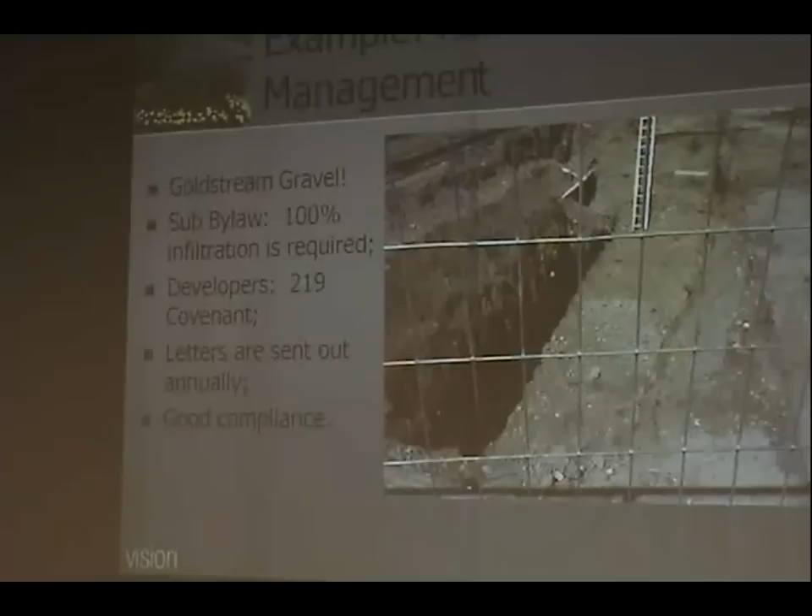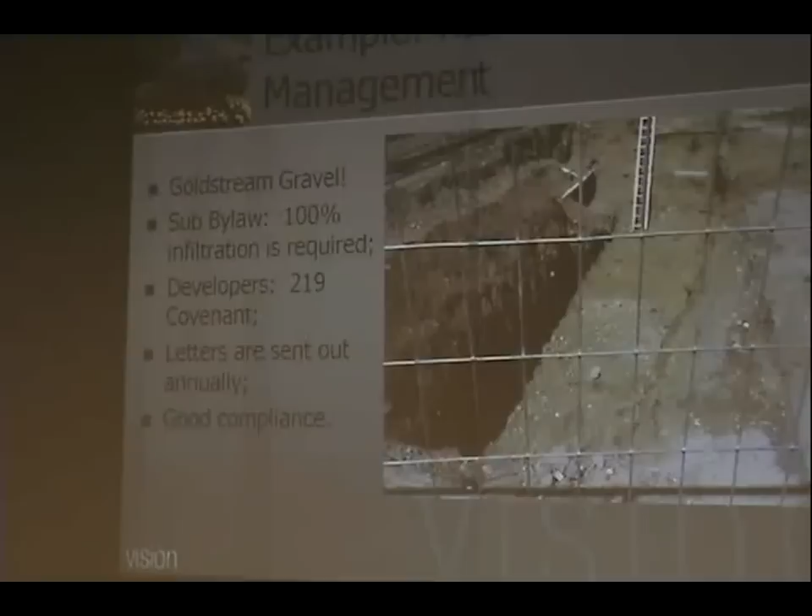Just an example of that creative approach. This started almost from the very beginning in the early 1990s when Langford was incorporated. Most of the downtown core, the area you're sitting on, is basically a big gravel pit, and there are a number of other gravel pits in this area. So we have a lot of very good permeable gravel in and around the area. It's provided gravel to the Victoria area for quite a number of years. In particular, Goldstream Avenue here is basically sitting on a gravel pit. Groundwater tables are very low in this particular location. As a result, under the Ministry of Transportation Highways, when they were the approving officer, we ended up with a lot of rock pits and on-site systems that were there.

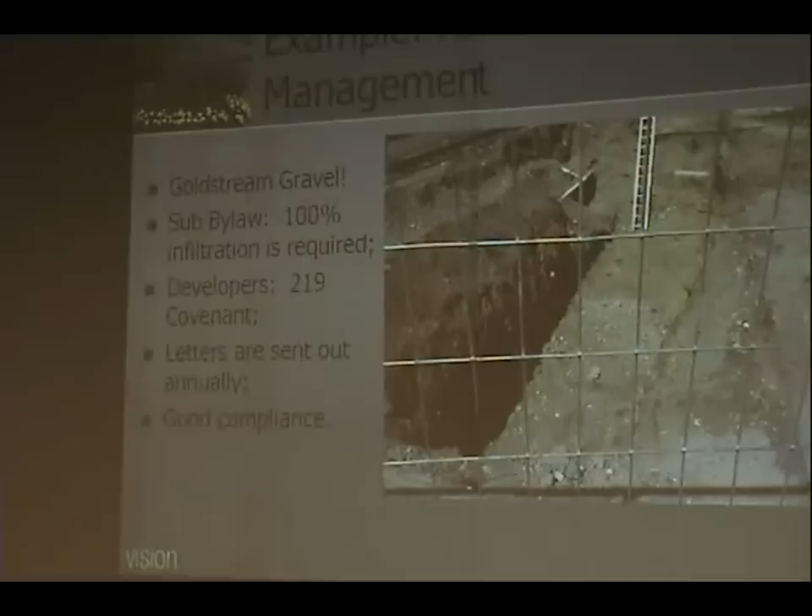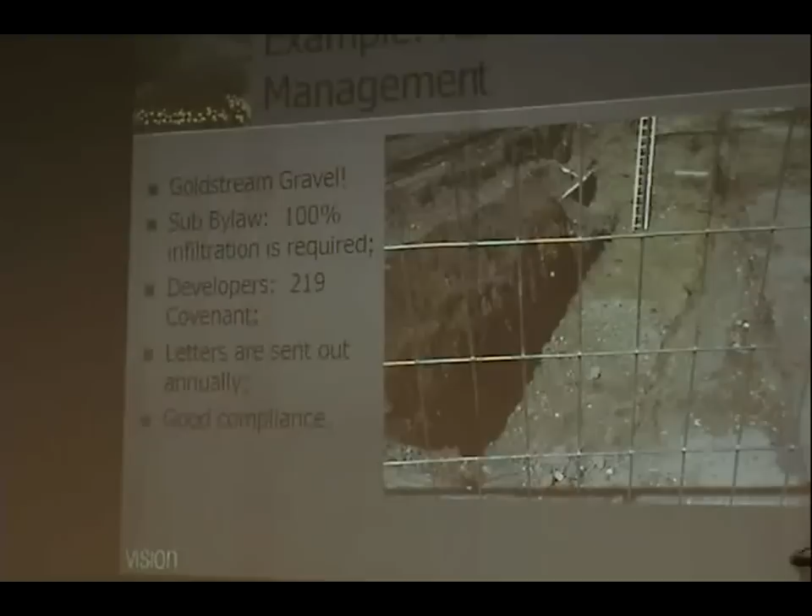At the same time, when Langford incorporated, of course, the buzzword was infiltration. So the engineering department of the day went 100% on it and said, okay, we're going to write in our subdivision bylaw, developers shall infiltrate 100% of their site. That was written in there in black and white, in the early 1990s. Most of the development was occurring in and around the downtown core, so they had quite a bit of success with it.

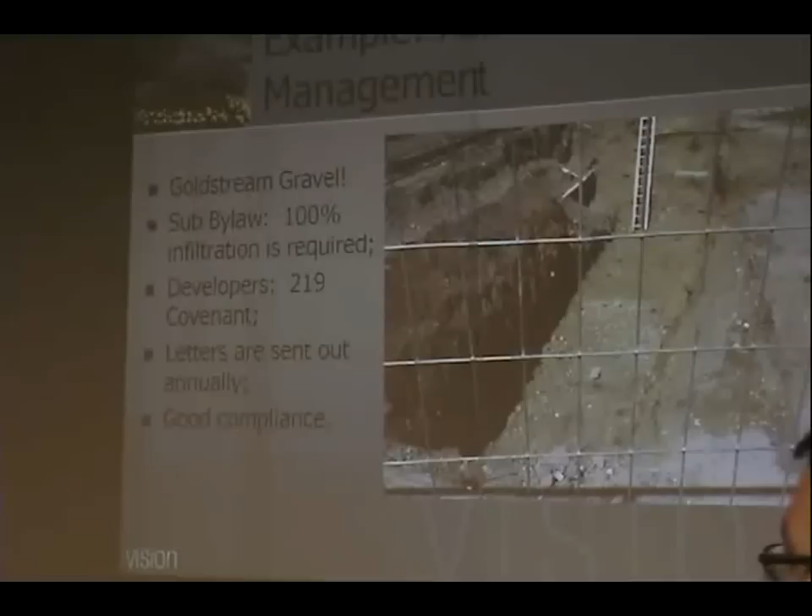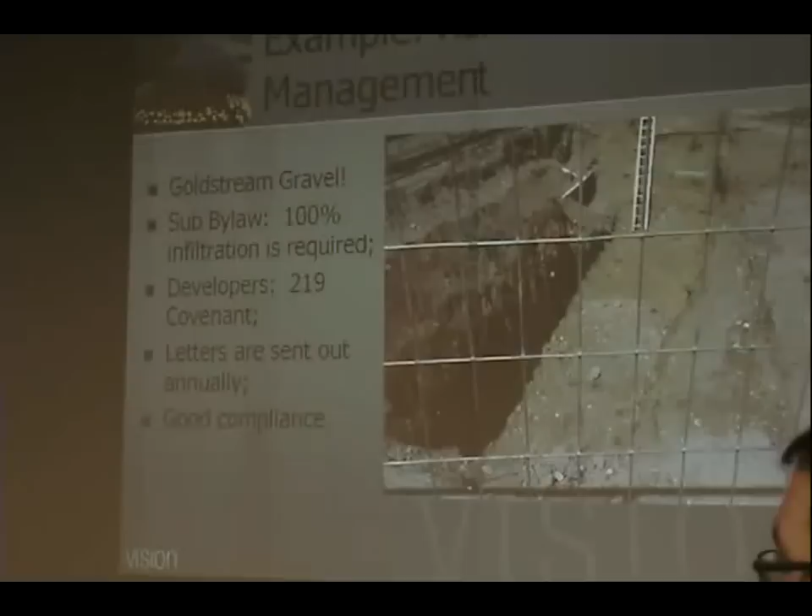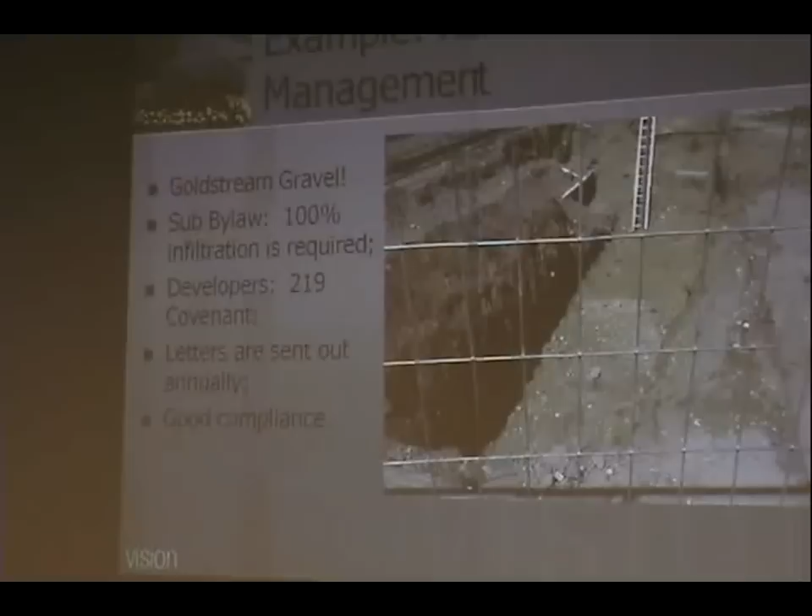One of the concerns, though, is that when you have a development site and you're asking them to basically deal with their own drainage, the first thing that happens is we don't get a storm drainage system in the street because there's nobody to build it. It's not a requirement, so the street ends up going complete infiltration as well as the developments. Of course, we're prepared to take that on the street side. We have a maintenance department. These things have to be maintained on an annual basis and replaced about every 15 years. So we have a program of replacing our infiltration systems. But the developers were a bit of an issue to deal with.

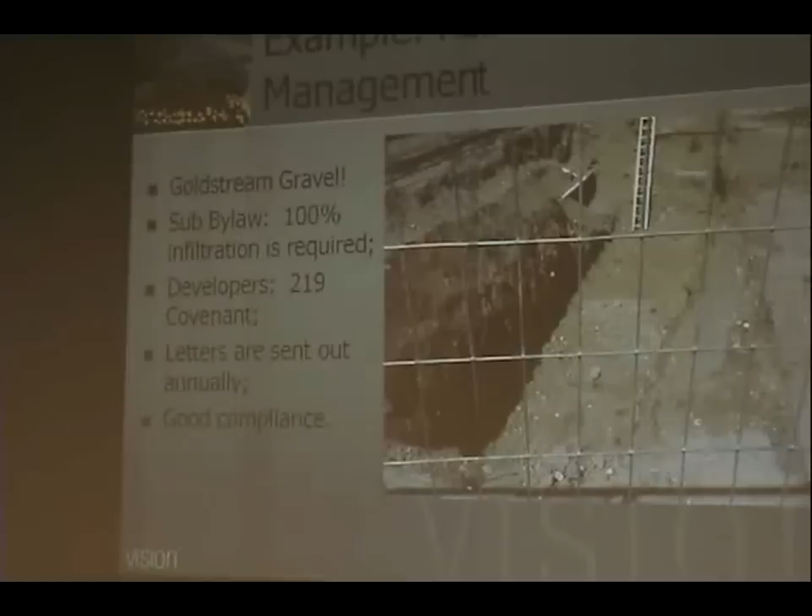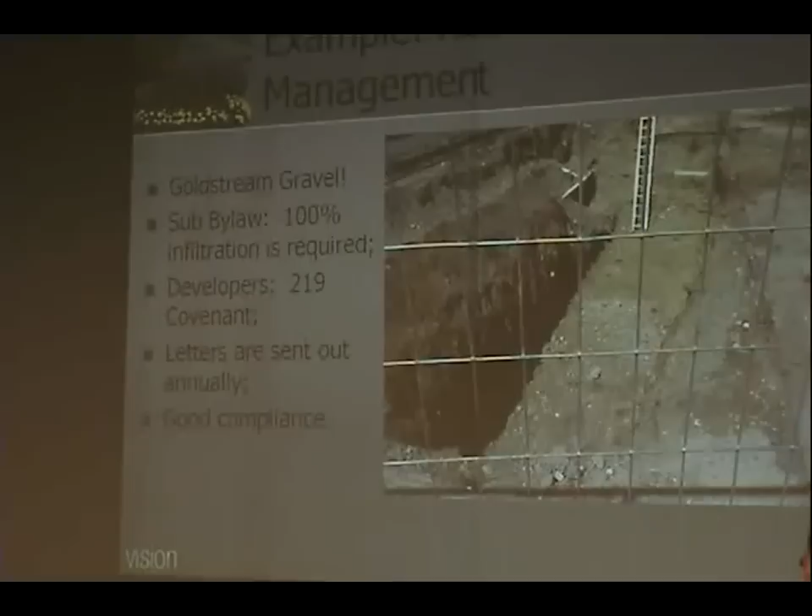So the policy that was created at that time was to ask developers to register a 219 covenant. These are mostly for stratas. The covenant says that the strata is responsible for maintaining the system on an annual basis. We send out letters - we have a listing of all those projects that are in that state, and we send out letters annually requesting them to provide us with copies of their maintenance record. It's worked fairly well. We've got a number of developers now - this has been in place for so long, a number are starting to say you don't really need the 219 covenants, people know. I think the concern was this is a different standard than what folks are used to - 'what do you mean I don't have a storm connection? What are you talking about?' So we wanted to make sure people were aware that this was somewhat a different situation. That was the purpose of these covenants.

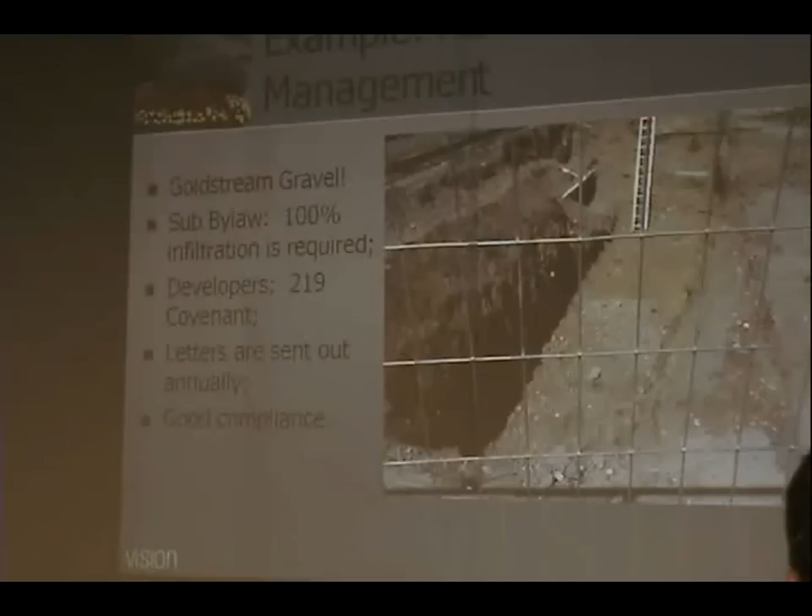So what's the infrastructure in the road that you have to replace every 15 years? Basically, there's vertical and horizontal infiltration systems. So it's a catch basin? Something like that, that's a vertical one. There's quite a few of them out now, they're very standard. This is, I think, one on the Peatt Road project - you may actually see it. This was taken yesterday, so you'll probably see one of these things as we do the loop down around Peatt Road. We're also putting in horizontal rock pits as well as the vertical ones.

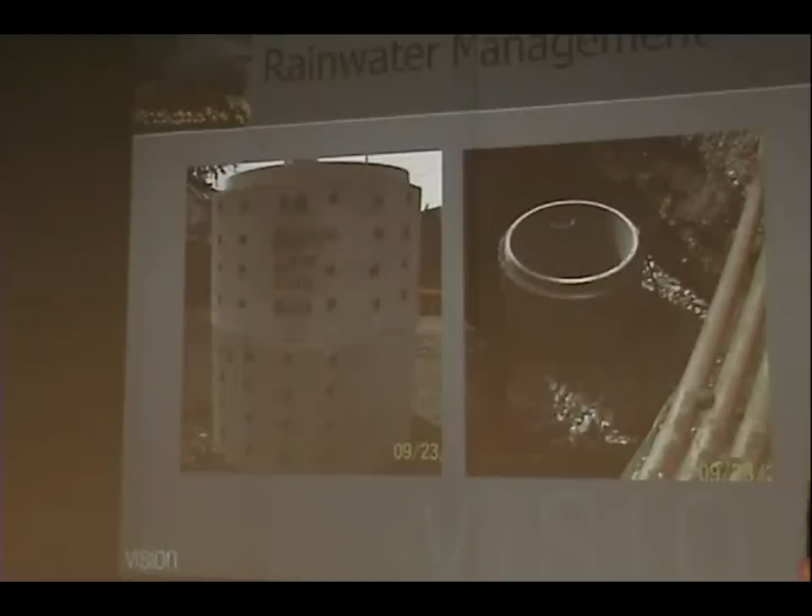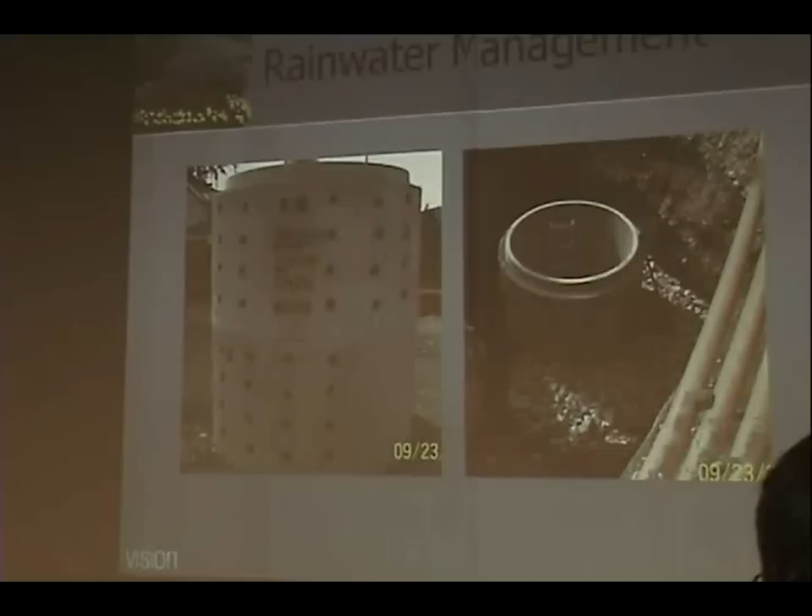So any issues about getting rid of the material that gets pulled out of those? In the non-residential developments, we ask for oil separators and some water quality boxes, so we're asking for them. After about 15 years - and it varies, we're just reaching the theoretical end of the lifetime on the first ones - the design has actually been modified over the years and improved. They have more capacity now than they did in the initial years. But we have replaced 3 or 4 of them. Basically, you have to go and dig that up because the gravels get clogged up.

Now, in between that - that's kind of at the very end of the lifetime, I'm forgetting to tell you all the stuff in between - you can go in there with a high-pressure washer and clean them out. So you do this annual maintenance, and it keeps cleaning it out. But eventually we know these systems, they don't last forever. Are you going to see these on our walk? You'll see one of them on Peatt Road, this one here - I think this one was taken a couple days ago. Have you ever had situations where the infiltration rate is inadequate for what's proposed? Good question.

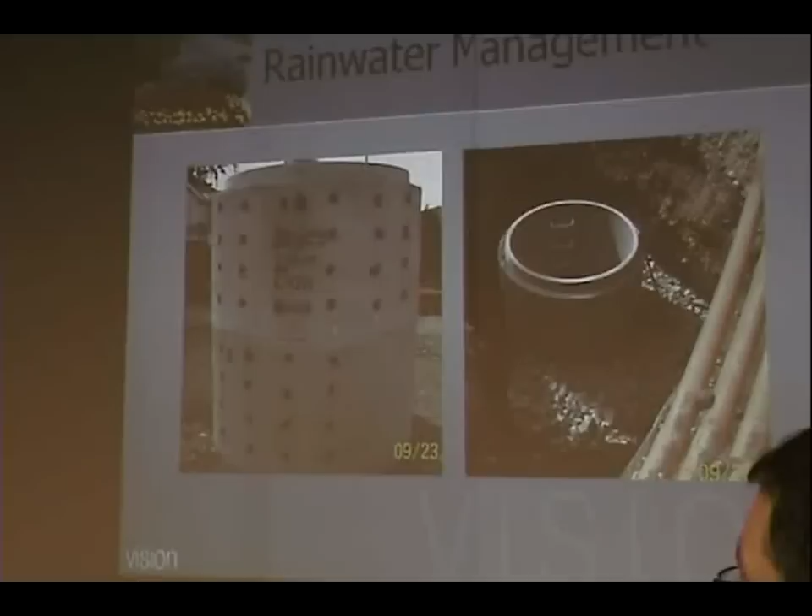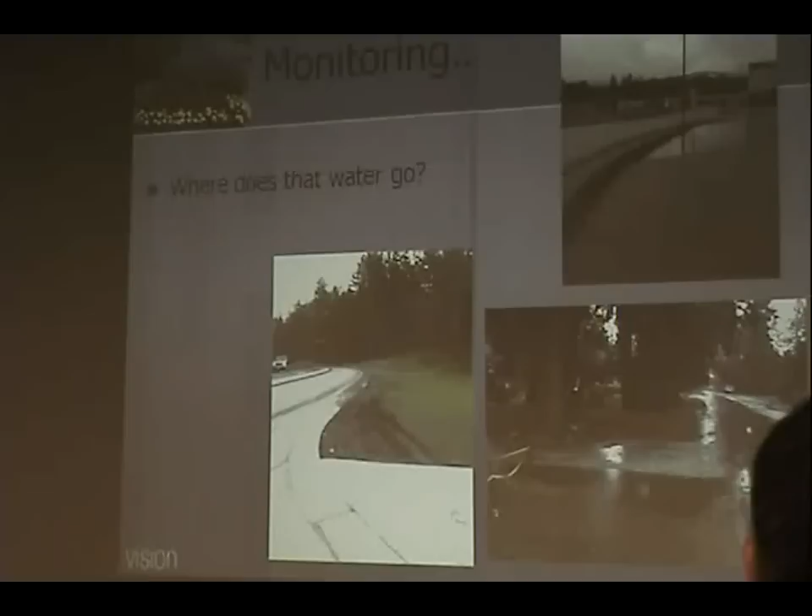The project here, right across the street if you open the window, has taken up virtually 100% of the property. So there's no room to put an infiltration system on the property, we think. It's three stories deep, there's underground parking, and there's a rock bed underneath that.

This is the problem we're having in the downtown core. As we densify at the lower densities where we had a bit of open space, it didn't work, and I didn't like the looks of this. So we asked them to put an overflow pipe that takes drainage out into the street. We have a horizontal infiltration system out in the street, and that horizontal pipe can function as a storm sewer if we have problems in the future, because the value of this building is too high to trust the rock business. Despite the fact they seem to have a pretty good track record, this is the point where the risk was a little too high for us.

So we're now actually, you'll see it on Peatt Road, our storm sewer being designed as an overflow pipe. We'll continue to use infiltration because it makes sense here and works reasonably well, and we'll continue to maintain them. But we're going to have a few overflow systems so that there's a storm sewer somewhere in the area if we have particular areas of concern.

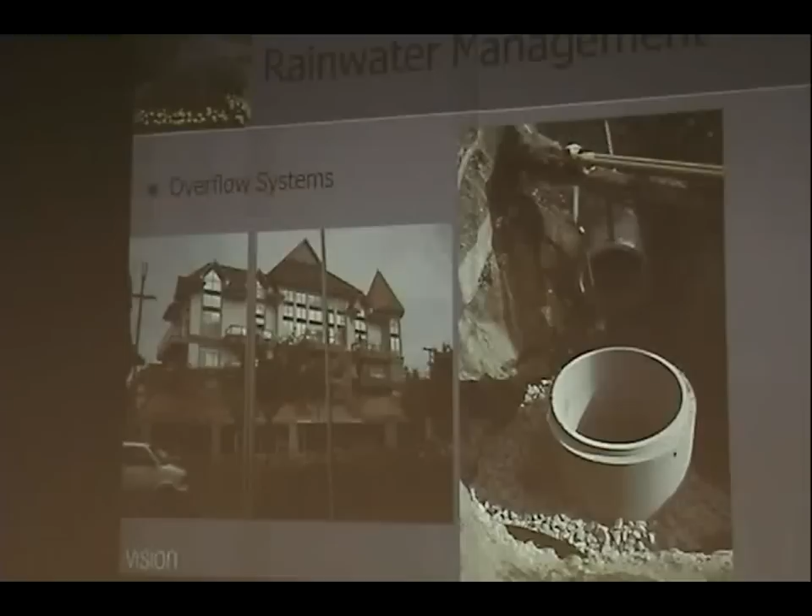The problem is if you get an area right in the middle of your downtown core that's not infiltrating, well, where's the storm sewer? It's five million dollars away, I think. So that's the other side of the infiltration pond—it already is detained, most of it goes in the ground. We don't actually expect the pipe to run, we're hoping it never does because it's all infiltration systems through there. But in the odd event, if one rock pit fails, it can get to the next one through the pipe system, so it provides an extra level of safety.

And if over time they all happen to clog up where you have a 200-year storm, we don't have to design these things to take a 200-year storm, so it makes them more economical. You can take that 1% or 2% of the water that comes through on a 200-year storm and get it down into a detention pond under the lake.

So, some of the challenges. The first question was from John, if infiltration isn't enough—yep, just one other question.

When you did your OCP, I'm assuming there's higher density going to be occurring in the downtown core. Was that taken into account with your infrastructure, and are all of these new higher density buildings, such as the one across the street, going to be draining into the street, and will that support long-term? We're evolving, and as the density goes up, we're going to be asking for these little pieces, basically asking to do horizontal infiltration. As that process proceeds, we'll be getting pieces that function as a storm sewer if need be. So we're asking for them to do that now in the downtown.

You're planning to? Yeah. So here's an area here in South Langford—core infiltration, same policy, but it didn't work so good. So this is an area where we're actually putting in some storm drainage and detention ponds and water quality, surface-type features that most municipalities are doing. We're doing that in South Langford.

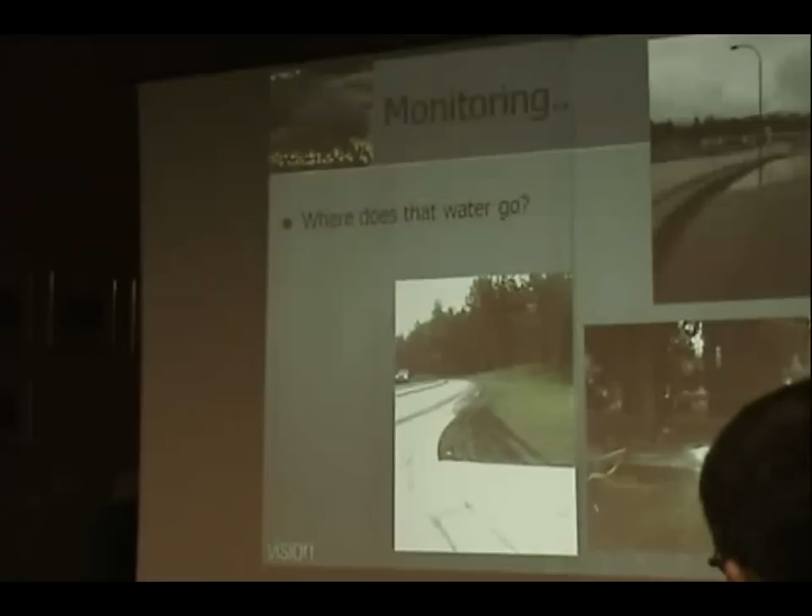Here's one here, you'll actually drive by it today. It's a dinky little site on Jacqueline. Every once in a while in the middle of winter, there's a retaining wall around the corner with a drain at the bottom. The water flows out the drain because it's coming from the street, but the water can't get down—there isn't a permeable layer low enough. It's been trapped in one of the service trenches and runs along the trench. So we have a business owner here with a nuisance flooding issue. It disappears a day later, but now we have to go in and make some changes because the water didn't quite go where we thought it was going to go.

This is up on Bear Mountain. This sort of started in the 1990s. We have basically a swale system on both sides of the road—if you've been up there, you've seen these flat curbs. The intention is to get the drainage to go into the swales and do the water quality work on them as they work down the swales.

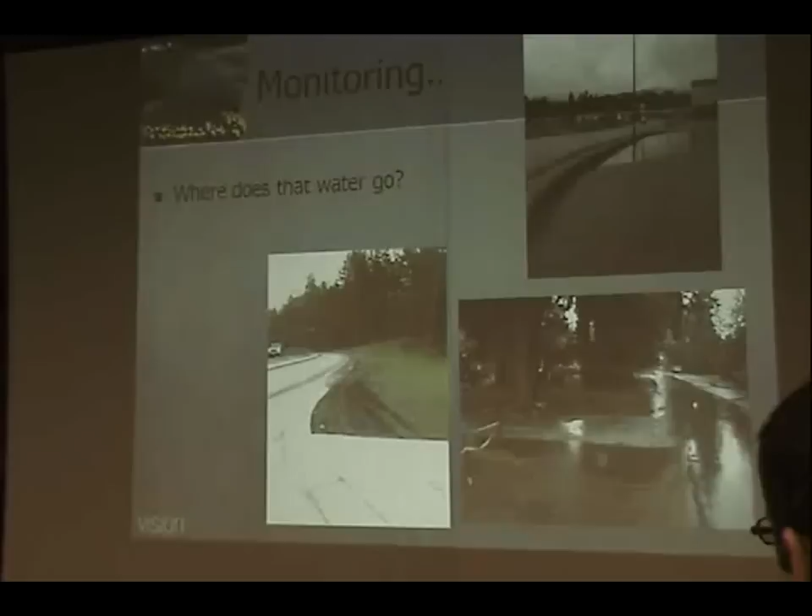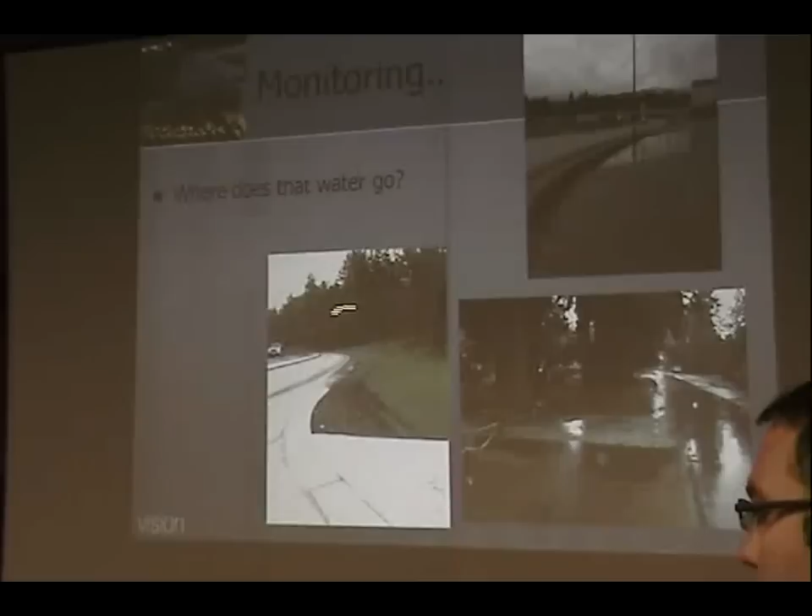Doesn't work so good in the wintertime. It's too easy for folks to drive off that road, either sliding off during snow events or just kids playing around. So we've had a lot of problems maintaining these boulevards. You'll notice we're going back and putting upright curbs there. This is also a great opportunity for us in the future to do proper rain gardens and provide a boundary to keep people from driving off the roads. Those are a couple of things we're looking at for the future.

So now that you're putting in curbs, are you putting curb cuts in? Oh yeah, absolutely. We're just kind of keeping the vehicles on the road—so it's more traffic control. Yeah.

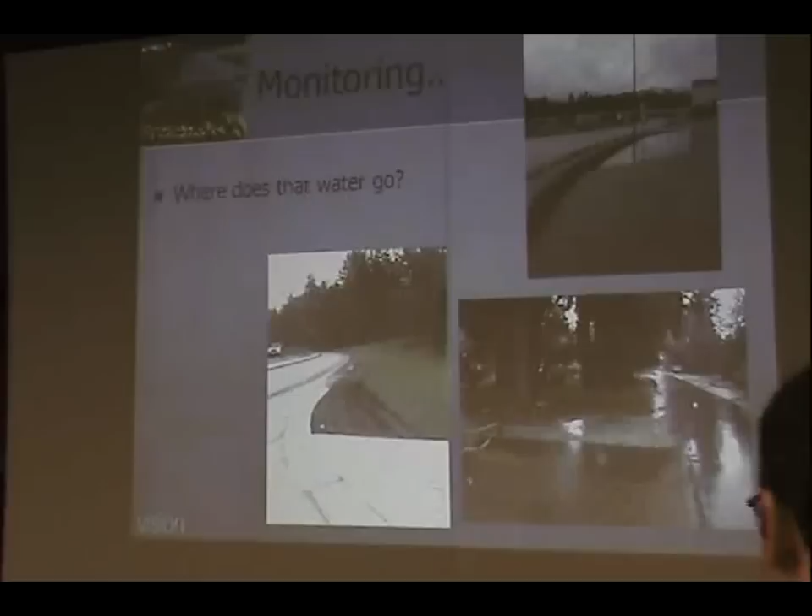Good hearing. So again, how that adapts to the rainwater.